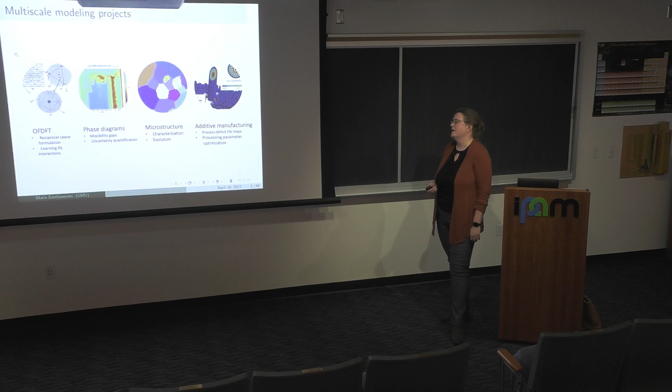And that's going to be the majority of the things that frame the theory that we're developing. But I also have a couple of other projects that fall within the framework of this workshop, and specifically we are working very closely with a group in thermodynamics to understand phase diagrams and how to compute and automate the procedure for phase diagrams. And there are a lot of developments right now in terms of uncertainty quantification. I'm happy to talk to anybody who wants to discuss that later on.

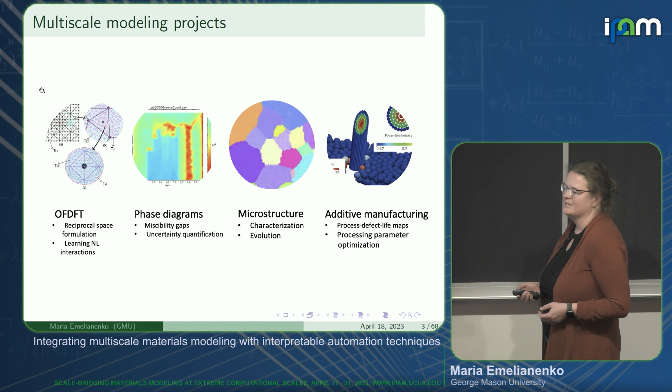I also have a project right now that has to do with learning non-local interactions in orbital-free DFT, and that's a separate work that we're doing at Mason. But the majority of the stuff I'm going to be focusing on lies in the realm of microstructure and additive manufacturing, which I think is a fascinating application, and there's a lot of need for mathematical development.

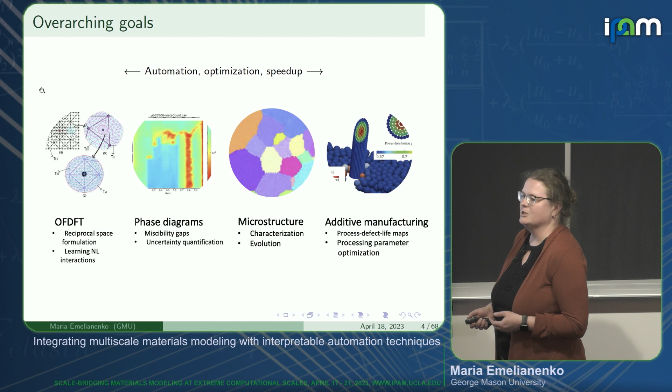So roughly what I like doing and what my group has always been focusing on is understanding how to automate things, how to optimize, how to find a relationship that can help speed up the computations and also guide the experimental design. In most of the things that I have been working with, we have to perform some sort of data-driven modeling across the scales, and I like to go from the very bottom to the top, or at least to some subset that doesn't belong to one scale.

So usually there are processing parameters that we try to optimize, or microstructure parameters which are mesoscale, and then we go all the way to the macro scale when we talk about mechanical response. And we want to understand the mechanism. So this is really what's driving some of the work that we're doing. And at the end, it's an optimization problem. A lot of the things that I'm talking about fall in the realm of what people call machine learning nowadays, but it's also just optimization and fitting sometimes, and it's just data analysis.

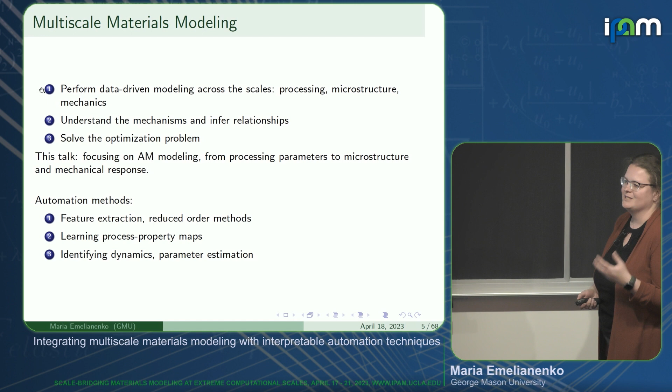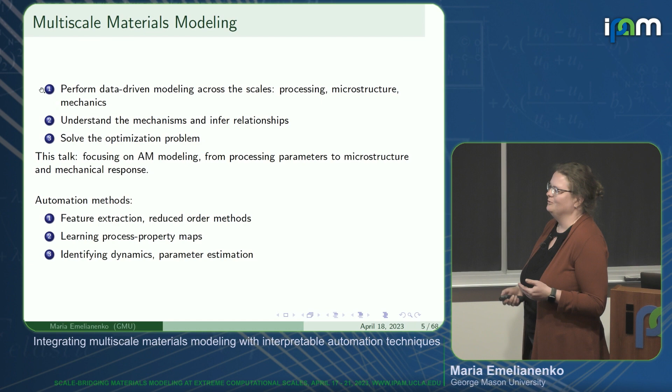So the methods that I'm building, this is the toolbox that we're trying to discover as we go and see what needs arise, have to do with feature extraction, reduced order modeling, learning process-property maps, and this could be manifold learning type of work, and also identifying dynamics and parameter estimation. So there's a variety of things, but I hope that at the end of the talk I will give you a glimpse of how they all fit in some of these applications.

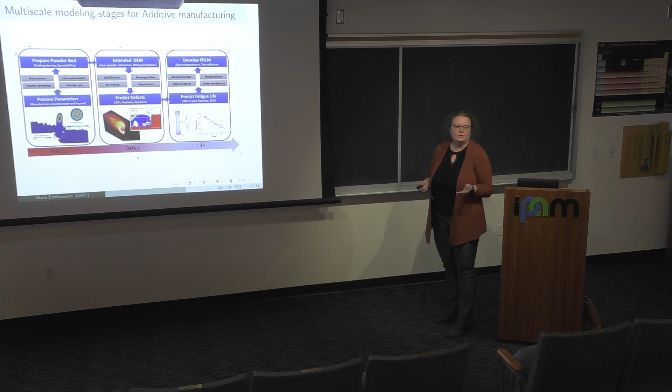So what drove me to this new project in modeling 3D printing or additive manufacturing is just the sheer complexity, and also the fact that there are so many interesting questions that have to do with how to really make this process work the way we want it to work, how we want to predict the microstructure, how we want to predict the performance of the material, and can we control it. We're using it more and more every day. The engineering field is booming. So can we put some mathematical intuition? Can we put some methods in place?

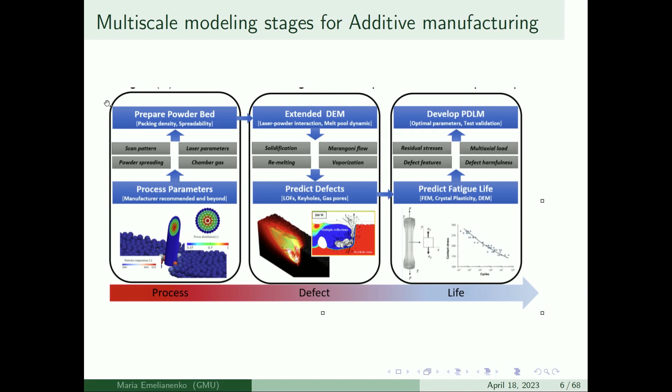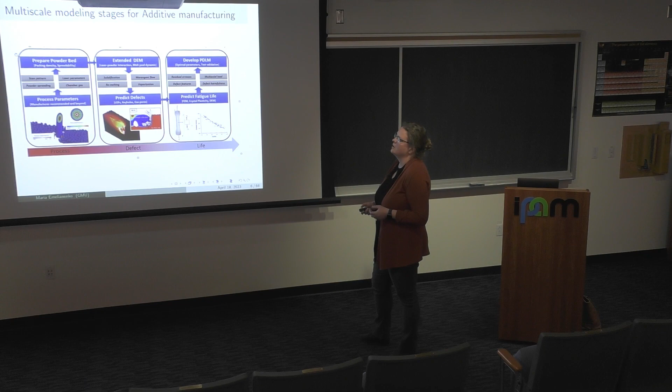So this is the integrated framework that we're using. I have collaborators in Luxembourg. They're performing the large-scale simulations of the powder fusion, and basically what we're getting out of these simulations are parameters that have to do with powder spreading, scan patterns, laser parameters, and chamber gas.

All of these processing parameters are essential in controlling the results of the process. But then, there needs to be the defect analysis. So there are a lot of defects in this process that get generated, and there's a variety of different terminologies. There's gas pores, there are keyholes, there are lack of fusion defects, and they result as a complex modeling artifact, but also in reality you see this in experiments as well.

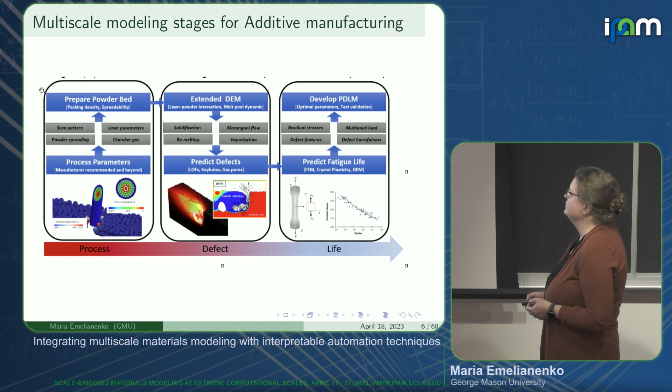And then after you have this defect information, we want to look at what happens to the fatigue life. So we chose fatigue, but you can do similar things with mechanical response in terms of elastic and plastic deformation. So that's roughly what we're looking at, and there are many people involved in this effort, but this group of Bernard Peters in Luxembourg, they're developing the code that incorporates these equations.

So basically you have energy conservation with boundary conditions. There is some sort of rate of melting that you assume. So all of these have a lot of different modeling parameters. And I'm stressing that the fact that there are a lot of modeling parameters is something that I want to focus on, right? So we want to actually reduce that number. And then we have momentum conservation, rate of melting, and such.

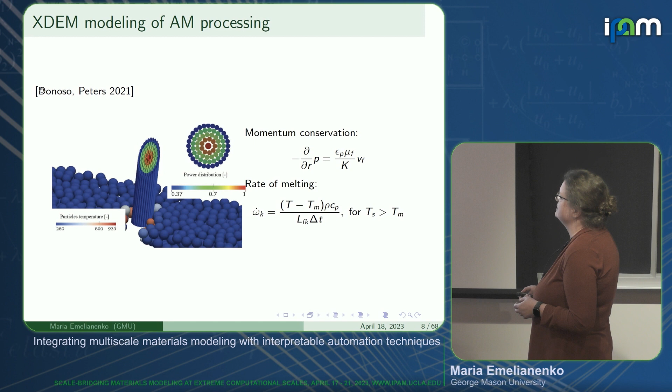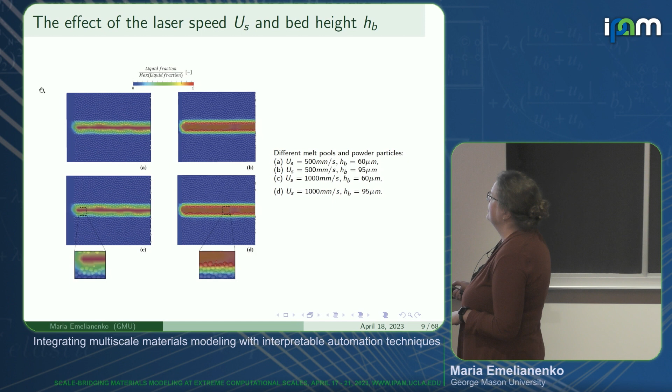And then there are a lot of different things that you can do. You can modify the laser speed, the bed height, all of these parameters in terms of in which direction you scan the sample, how you put it on top. So all of these technicalities. But you produce different results, right? And then you have to do the microstructure analysis of the sample.

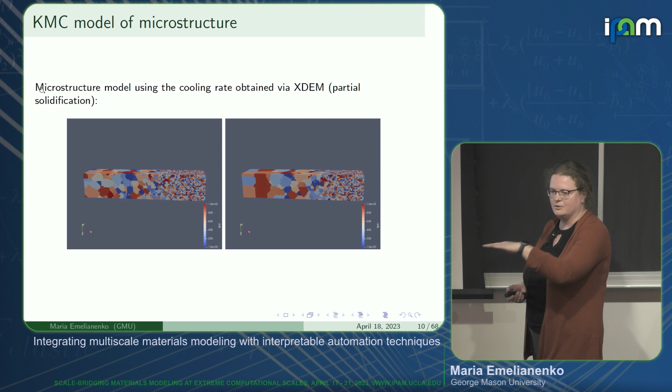And so this work is actually the KMC type of simulation that they're doing, which you can see is very uneven, and it's very different from the pictures that Katayun has showed, because there's a lot that's going on in this process. There's a very quick solidification, and then there's another pass. So the microstructure is really tough. It's really not easy to even understand what it looks like.

And so what we started with: NIST, the National Institute of Standards and Technology, has a set of benchmarks. So they actually calibrated their experiments, and they carefully curated the set of data for the specific purpose of additive manufacturing modeling. So we took a couple of samples, we looked at them, and they provide this microstructure. So these are experimental samples.

And you can guess that this is going to be the case, but obviously, depending on how you cut and which part of the sample you look at, you will have a very different structure, and of course, it will manifest in different probabilities of you getting a fracture or some sort of different mechanical behavior as a result. So there is a lot on their side that people have done to understand.

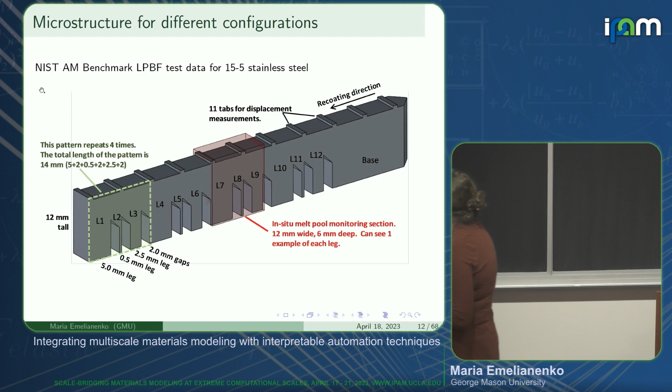To work with these specific samples with specific examples, people are competing over which model works best to represent these experimental results. But for us, the first thing that we were trying to do is to understand, first of all, can we do something fast, right? And fast sometimes doesn't mean good, but one very long-standing problem in this field is to trace the boundaries of these grains. And so, our collaborator, Katayun Barmak, used to use graduate students who would just trace it by hand.

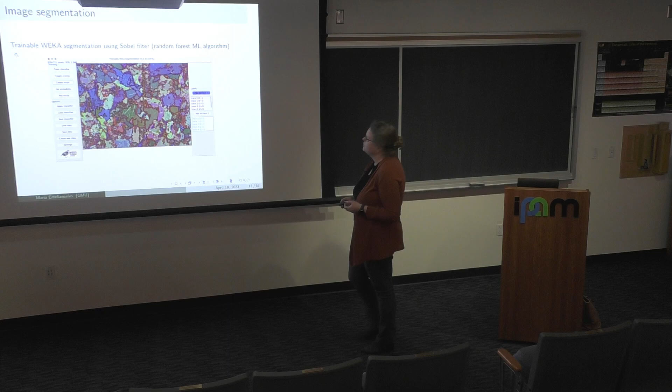And of course, nowadays it's an imaging task, so it should be done by a computer. So we should not subject anyone to this labor if we can afford it. So indeed, there are tools, and this particular one is the ML algorithm. It's using a Sobel filter, and it's doing a pretty good job. It's tracing those boundaries, and the images are kind of nasty. They're really not so clean, and you can see defects inside.

But you can actually get the boundaries, and it can tell you the size of the grains, and all of these characteristics. So it's nice that you don't have to really spend hours tracing it by hand. Yeah. But did you try to check different statistical metrics? Because okay. That's next. Yeah, so absolutely.

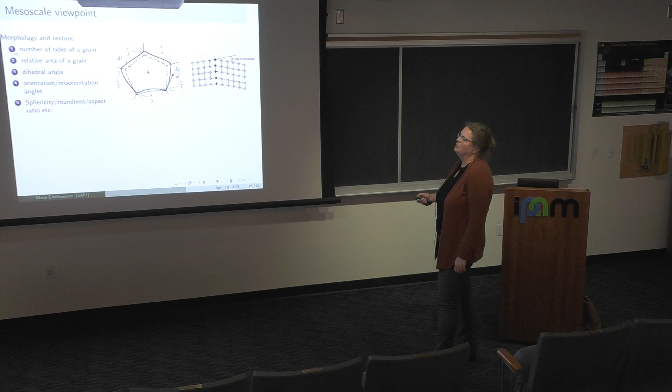So this is basically what we need to do always, is to look at the statistical distributions, and there are a variety of different measures. So the software actually does calculate the circularity, the roundness. There's also, what we need to know, the relative areas and dihedral angles and all of that.

Whether we have done an extensive analysis, no. But what we have seen so far looks reasonable. I do feel that these methods, although they're fast, they need a little bit of tweaking. The way this model works, I don't know if any of you use this particular software, but it asks you to trace some boundaries by hand, and then it's learning as it goes.

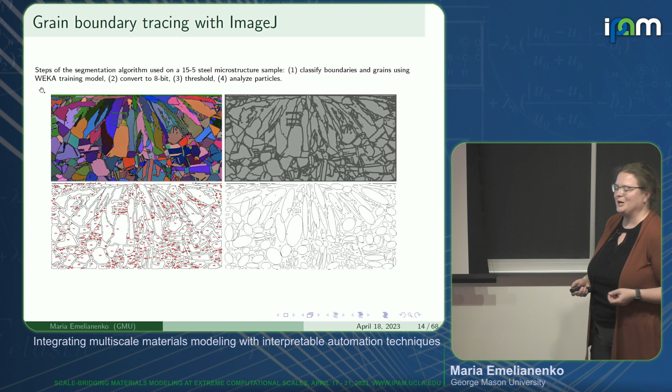So you can see, if it needs more input, you would trace more boundaries. So there's a little bit of labor-intensive part, but it's really fast. In my experience, I traced maybe 10 of them, and it did a pretty good job. But it could depend also on the image. So it is one very quick machine learning task that we were able to bypass and use the technology that's available.

But then, this is really not telling you much. What we need to understand in this sort of application is how to correlate the processing parameters with some statistics, with some mesoscale characteristics, and with the mechanical response. So this is the image that I'm showing every time I'm giving a talk about microstructure, because there are all of these parameters: the number of sides of the grain, the area, dihedral angles, orientations, and all of these will potentially play a role in additive manufacturing as well.

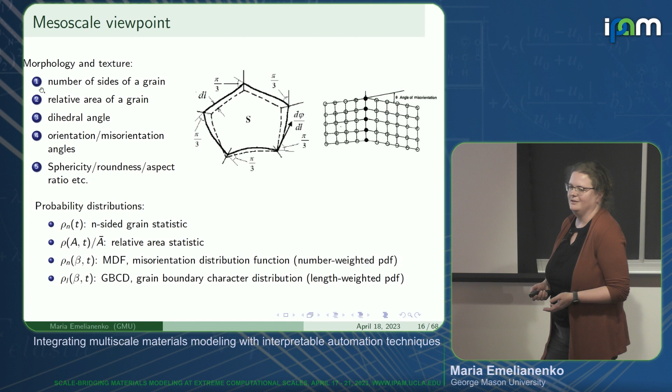One particular characteristic that we discovered unrelated to additive manufacturing is the microstructure disorder characteristic. It's a very easy concept to grasp. It's just the information entropy type of concept. But what you can do with it is look at any random variable, be it number of sides or areas or any roundness characteristic that you want to impose on a grain, and measure it, right?

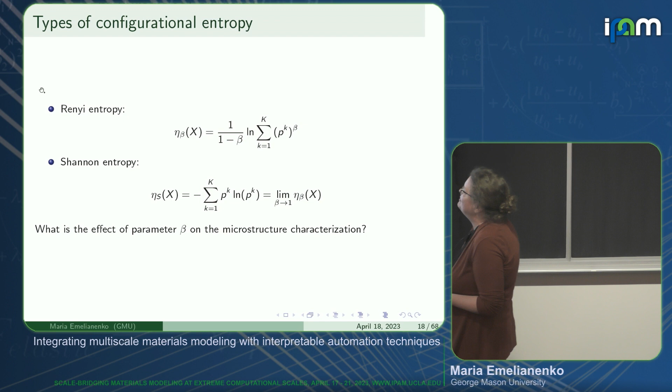I wanted to draw your attention to this because we found some interesting results when we started changing this Shannon entropy and introduced the Rényi entropy, which has this parameter beta, which in the limit gives you the Shannon entropy, but it doesn't have to be 1. And we correlated the results with simulations using this distance between microstructures. So we're basically computing this Jensen divergence. We focused on grain area and the number of sides, but you can use other variables, other random characterizations.

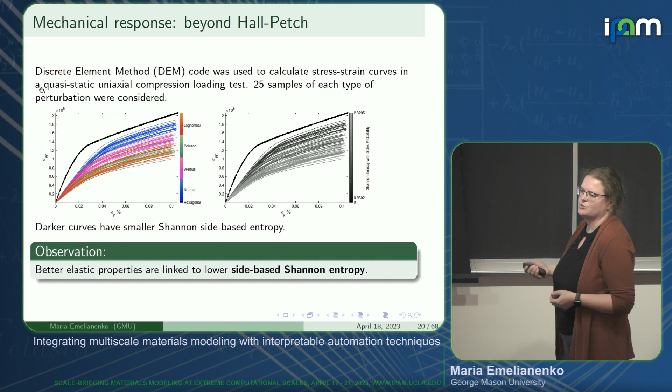So this was done with DEM, discrete element method. What we tried to do is create these samples, which were randomly distributed with a certain entropy parameter, and then we looked at the corresponding strain stress relationship. And what we found is that it's actually very much correlated. The darker curves have smaller Shannon entropy. The top one will be the perfect hexagonal lattice. And when we distort it and introduce more disorder, the curves go down. This was pretty systematic and pretty clear from all of the runs that we tried.

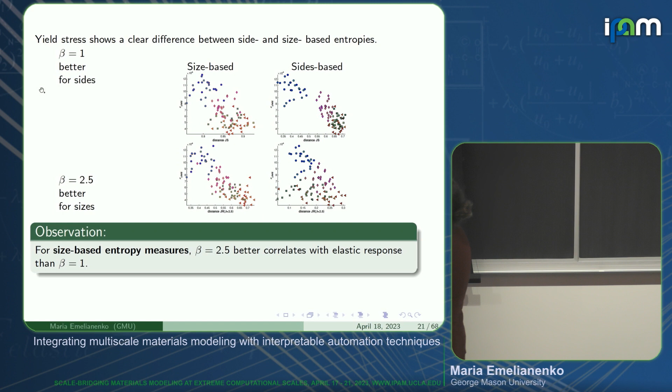The other thing that we did is we looked at the yield stress. There it was less clear what's going on, because what we wanted to see is some sort of a clear correlation: if we change the entropy, then the response changes accordingly. And it was better correlated for beta equal to 1 for the side-based statistic. But when we looked at the sizes of the grains, beta equal to 1 gave us this big mess. When we changed the parameter to 2.5, it allowed us to see those clusters and the correlation better.

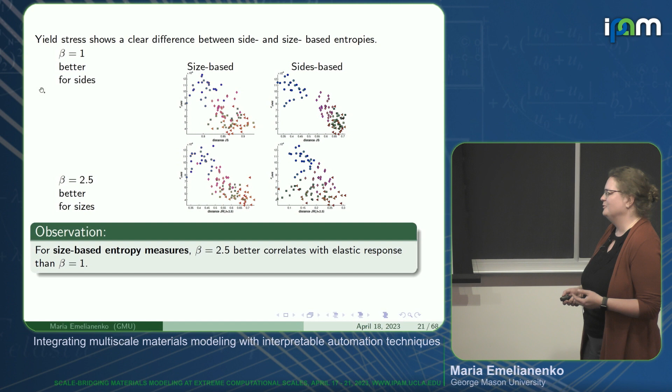But this is just empirical evidence, right? This is not really a theory that can explain, but what it does bring us to is the realization that there could be a lot of different characterizations of the microstructure. And how do we pick one? How do we actually make sense of what's going on? And can we build a theory for it?

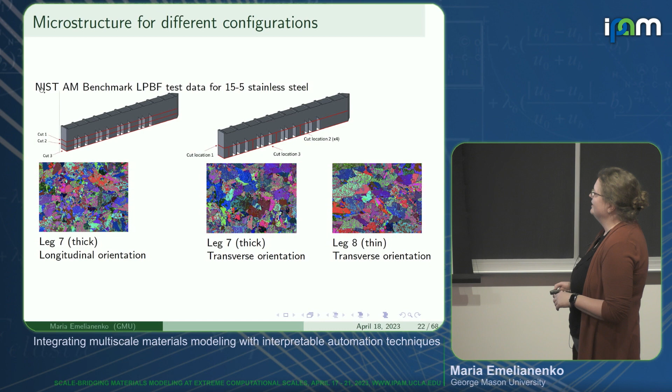So again, going back to these images, which were all fuzzy, I showed you how we try to understand what's going on with the images. We also computed some of the parameters in terms of roundness, circularity for different legs of that construction that they had in the benchmark. But it's giving us more open questions: which microstructure properties best correlate with residual stresses, entropies? How does the melt pool play a role in this? Because there are melt pool characteristics that we have not taken into account.

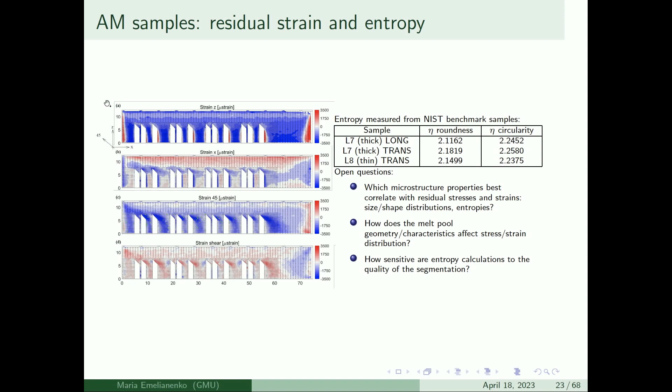How sensitive are these entropy calculations to the quality of the segmentation, and so on and so forth. So it's definitely a task that you can try and put somebody to measure all of these things, but there must be, again, some way to bypass that manual labor, right? Like there should be some way to automate the process, and that's what is driving our research.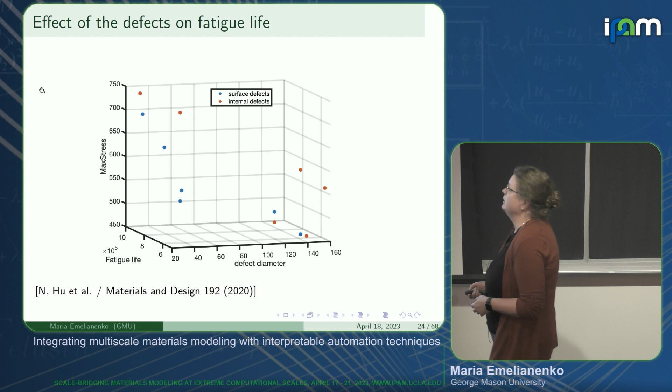So again, an additional aspect to this is that the defects play a role, right? So the defects, depending on where they are, surface defects versus internal defects, the corresponding stress and fatigue life are affected. So if you have more defects at the surface of the sample, then you see these blue dots here compared to the red dots in the internal. And there's a lot of experimental literature on this. So this is not something that we have done, but we have looked up a variety of different papers.

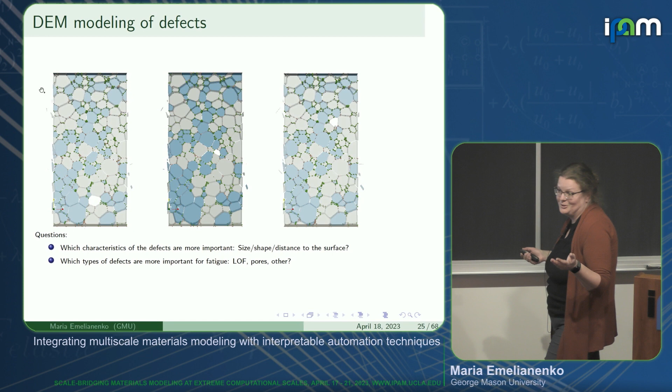And what we have tried to do naively is just to put these defects in the DEM code inside the sample and then move it closer to the boundary, closer to the surface. And we actually have calculations that show that it does affect the corresponding fatigue life. So again, what does it say? There are so many entangled characteristics, right? So how big the defects are, what is the geometry, what is the melt pool, how close they are to the surface. So all of these things combined make a higher dimensional task for us to work with.

So what we realized is that it's basically a minimization problem where we have to have some sort of relationship, right? So if we want to minimize defects, that would be this F, the fraction of defects in a microstructure. We need to also take into consideration the corresponding microstructure characteristics we want to optimize. So we want to minimize some collection of things, right? It's a multi-criterion optimization where we want to achieve a certain elastic and plastic response as well as some characteristics of the grains. And there are so many knobs to pull, right?

So with this problem, you can focus more on defects, or you can focus more on the microstructure optimization, and then how exactly to go about optimizing this distance between the microstructures is even harder to tackle. So you have to learn the surface if you want, or somehow a closed form representation of the problem to make it easier to solve. How possible is this? So we're making progress. I'll tell you about some of the methods that we're developing that I think will be fundamentally useful here.

So one work that we found that was very relevant is the work by Bakarji et al., just published recently. What they're doing is they're using machine learning in a very unusual way. They're learning the dimensional groups, or I would rather say non-dimensional groups. So the Buckingham pi theorem is this dimensional reduction result that everybody teaches maybe in an undergraduate applied math class. And usually if it's a small problem, you can do it by hand. If it's a problem with multiple parameters, you can still form a matrix with units attached and still do the reduction.

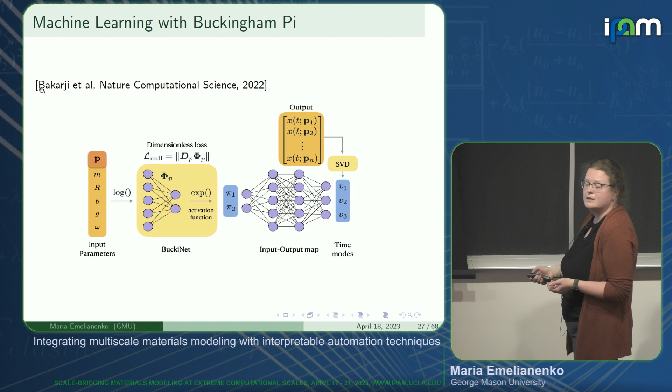So we're going back to the basics. In general, in statistics, you would use a PCA or SVD to find the dominant directions. And this method, of course, can be used directly, because if you look at their chart, they are using SVD to come up with these modes at the end. But what if we cannot do the SVD? Sometimes the matrix is so large that you just cannot pull it off. So what we needed to do is think about a way to decompose this process and somehow divide and conquer. Use a strategy to reduce the dimensionality.

And so this slide is obviously not a surprise to anyone. This is just a regular SVD decomposition. So you have your unitary matrices, U and V, and you have the diagonal sigma. And then you can, of course, truncate it if you know that the profile of your singular values is decaying. Then you can cut it at a certain point, so you can speed it up.

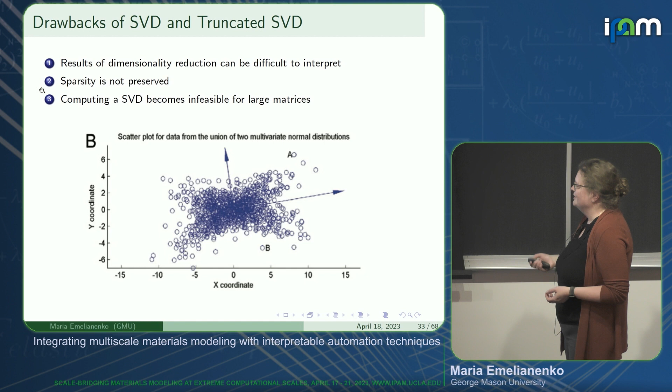But one of the biggest challenges, the one that's preventing us from just directly using SVD, or at least presenting a problem, is that when you're doing an SVD, you're projecting on these SVD directions, on the principal components, which don't mean anything. They actually are not physical, right? They mean something for the PCA or the SVD, but they're not your original physical parameters. And so we're going away from really looking at the data, and we're looking at this XY coordinate space, which is not interpretable. And people have thought about this. In this case, it's kind of nicely oriented, but this picture shows that it's really not clear how it's related to the x and y coordinate. It doesn't have to be related.

So there is this paper that came out in 2009 that is very interesting, and it generated a lot of activity after that, which is the CUR decomposition. CUR is basically a process of selecting columns to get an approximation to the SVD. So you're getting something not exactly equal to the SVD decomposition, but your matrix approximation can be made arbitrarily close to your SVD by doing this procedure. So this method we can use, and that's great. We knew that we can incorporate some of this interpretability, but it still doesn't solve the problem of dimensionality.

So what we have done is basically coupled it to the concept of centroidal Voronoi tessellation. And centroidal Voronoi tessellation, if you're familiar with this, is a very powerful way to tessellate a domain, decompose it into cells and find the representative features in the data. And in this case, the distance that we will be talking about is the distance to the subspace. This concept is very flexible and generalizable to a variety of different contexts. But here, basically, we're picking the distance, which is the projection on the subspace distance, right?

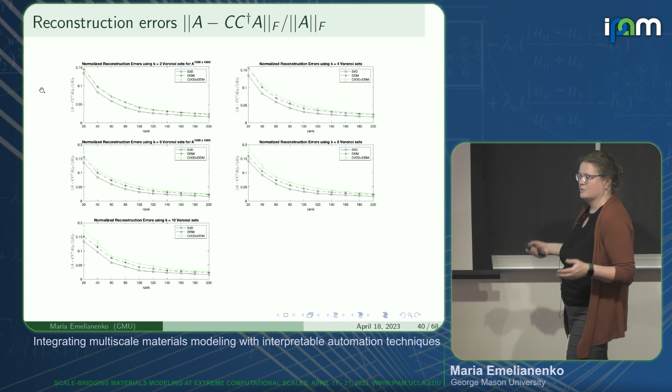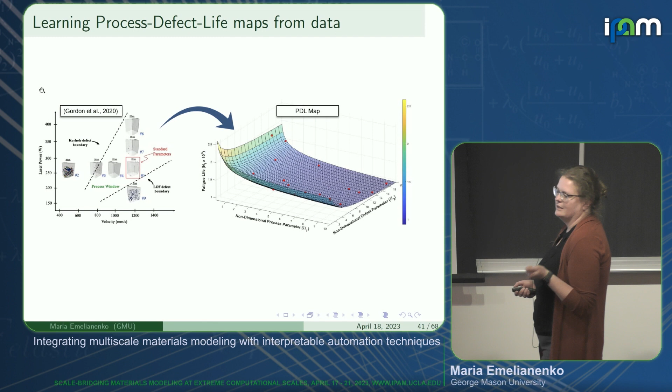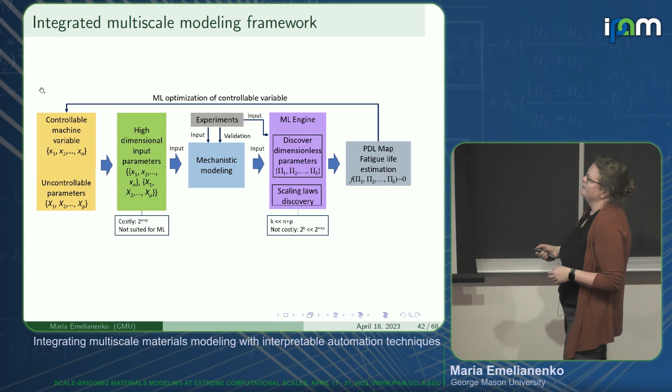And so this is kind of the overall schematic, right? So we have controllable parameters, and we're going through this mechanistic modeling stage to come up with dimensionless groups through our machine learning engine, and then get the PDL map as a result.

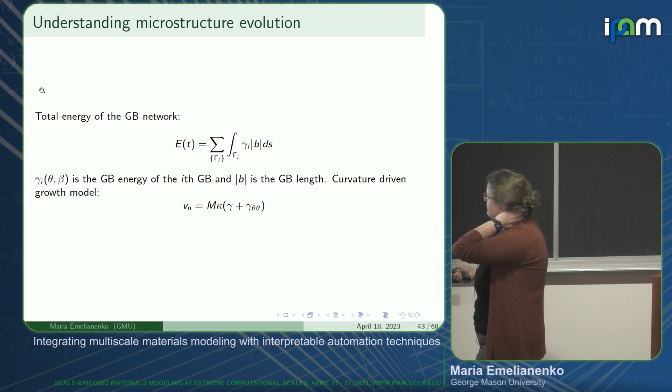The question is, what happens to microstructure? And that is a non-trivial question. And as you have seen, Katerina gave a talk about the different developments and how to model microstructure evolution, even in the context of just this thin film with no additional layers. I'll give you a couple of things that basically can help to understand it, but I will not give you the solution to this problem. So this is the same kind of energetic formulation that you have seen, and the curvature-driven model can be postulated like this.

What we do have at this point is we have a variety of different models, which are kind of PDE-type models that Katerina talked about, but we also have simulations. So one type of simulation is based on this straight line approximation, very simple vertex code. So you're basically tracing the motion of the triple junctions, and the boundaries are straight lines. And it amounts to basically the triple junction dynamic equation. It's similar to a triple junction drag. If you're familiar with that concept, it's basically saying that triple junctions are playing the most important role in the process.

So we actually have done a lot of work to prove that this particular implementation of the vertex code is stable. So we have stability analysis, kind of like a CFL condition type of result. And still, if you look at what happens to the results, they fall not exactly on top of the experimental prediction.

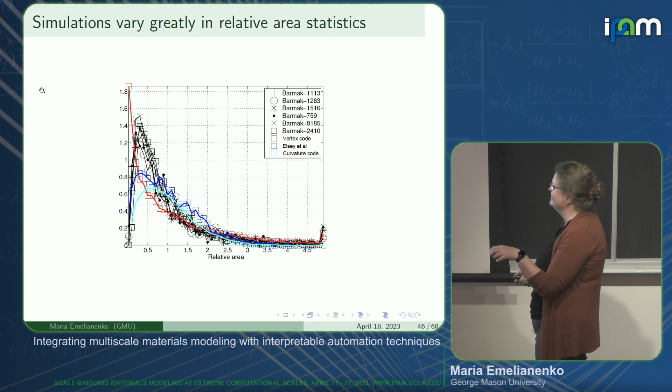And what we saw is that you can change where this curve is if you change these mobilities of the triple junctions. And so that motivated us to look into the development of this coupled model, which couples boundaries and triple junctions together. And then you have flexibility to choose the ratio between the two mobilities of the boundaries versus triple junctions.

And so this was kind of the Lagrange interpolation type of idea that Claudio Torres and his students have developed recently. And so you can basically implement these codes, and you can run large-scale simulations with a lot of grains. What you see is that there is an effect of this ratio, as I said, right?

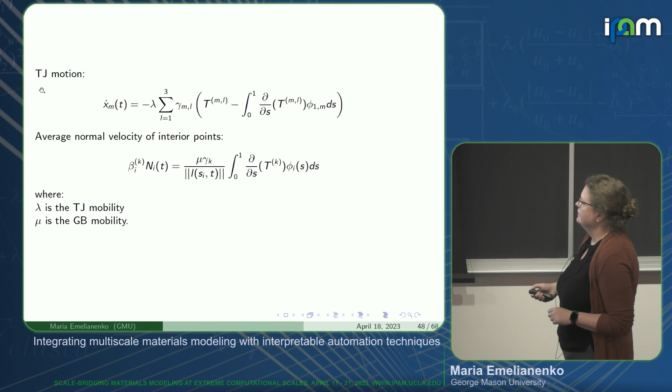So this ratio kappa is the mobility of the triple junction versus the boundary. So if you have 1, then they're equal. But if you have kappa equal to 1,000, then, let's see if I have it somewhere here. I did not. Yeah, so basically that would mean the triple junction drag. So right here. All right, so this lambda dominates compared to the grain boundary.

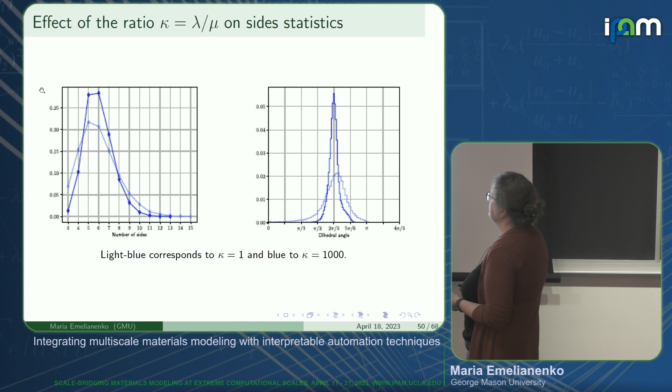And you can change the shape of these distributions, and you can match it with the predictions of the experiment. But all of this is to say that there are a lot of things that you can modify, but it still doesn't give the full description of the process. So there are mesoscale theories that have been developed, so I will not go over this because Katerina already talked about some of them. So Mullins von Neumann, the McPherson-Srolovitz, and so on.

And so this is roughly the hierarchy of mesoscale models. So this is the model that Katerina is extending right now, including many more parameters than originally stated in this form. We also developed the model that basically treats all the misorientations as particles that are colliding. It's like a gas dynamics model, which resulted in a Boltzmann equation.

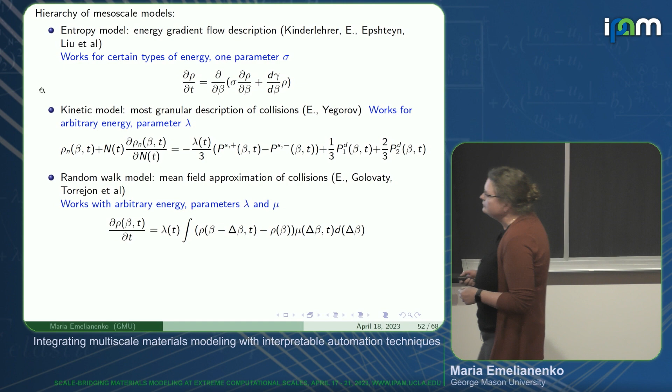So in this case, all of these collision terms do describe the specific reconfigurations that take place during the grain growth. And it's 2D, but it does handle energies that could be non-smooth, for instance. So there are a lot of integrals on the right-hand side of this equation. And we also had this random walk model, kind of similar to the stochastic process description that Katerina talked about. So this was another attempt to try and model the same thing.

But there are still questions. So one of them is, of course, generalization to 3D, which is difficult, but I think doable, especially in this case. But also the formal derivation of the continuous limit. So how exactly these models are interconnected. That's still a very interesting question, whether or not, for instance, we can show that the equilibrium for these models match in a certain situation.

But the question to me has been for a while, how do we actually go and model something like additive manufacturing? Because that's really much harder to do at this scale. So one idea, and I have not tried this, but there's a lot of literature, and some people have looked into data-driven dynamics identification. I don't think anybody tried to actually fit this particular problem, so that could be an open question. I'm happy to collaborate with whoever is interested in that.

And I'll just mention, I didn't talk about SINDy specifically, but there are physics-informed neural networks that have been tried in this context, as well as dynamic mode decomposition. So the question would be, if we use a sophisticated machine learning technology like that, can we actually get something similar to what we have derived from first principles? And that would be an interesting task.

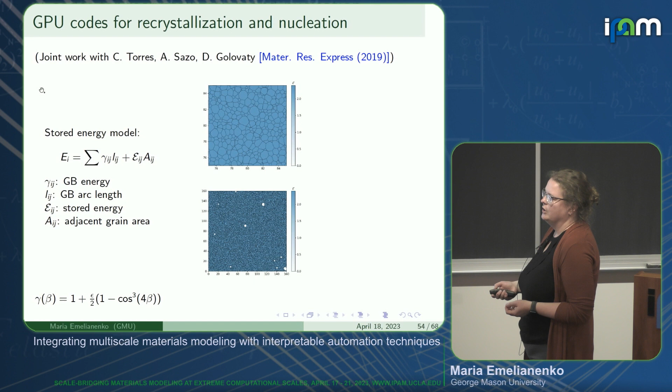One thing we know how to do, and we want to use it in this more complicated context, is we know how to add nucleation. So this is the code that we have available. This is a GPU parallelized code that incorporates stored energy, and that allows us to nucleate grains of specific misorientations. So this is the mechanism that seems to be actually quite easy and not so sophisticated compared to the previous descriptions that we had.

We did a lot of work with this particular code, so we actually have the code, and I think it's handling like 1 million grains right now. So we have done development of stability analysis.

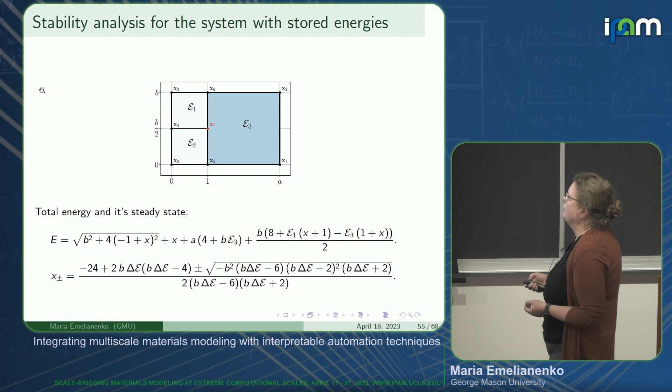For instance, for the stored energy, we need to know how to write down the total energy, and based on this, we can say for which conditions we will have steady states and the bifurcation change. So this informs the selection of the parameters for this code, and we also know what would be the corresponding steady state. So we tested the code, and we actually derived analytically that in the absence of the stored energy, this will be 2 pi over 3.

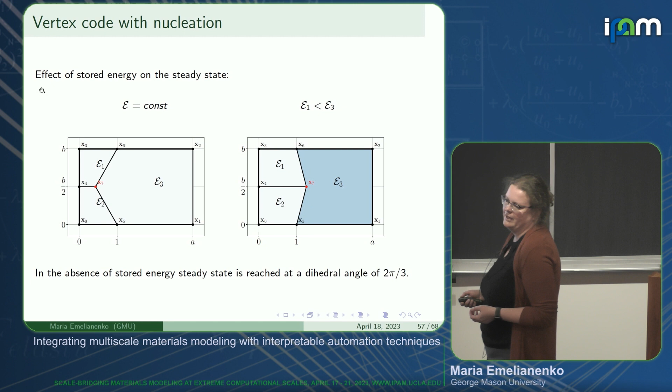If the stored energy is constant, but if there is a stored energy that is, for instance, bigger on one side, then your stable configuration will no longer be 2 pi over 3. And you can actually show this. It kind of looks weird, and maybe we're used to having Herring type conditions at the triple junctions, but it will not be that way if you have some sort of stored energy.

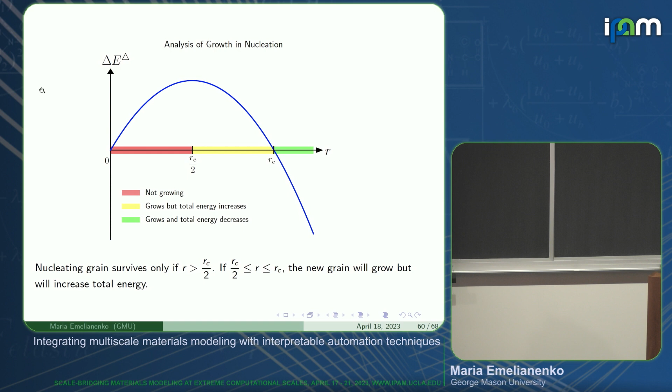This is a little bit more detail about how to nucleate. So we basically look at the middle of the triangle, and then we nucleate a grain if a certain condition holds. That's based on the stability principles that we defined, and we have the critical radius of the grain derived for which we can expect nucleation. So this is just a picture showing that if you exceed a certain critical radius, then you definitely nucleate. In this regime, the grains will grow, but the total energy will increase, and then you do not have a growth in the red area.

And the only thing I would say on top of that, it seems like a Monte Carlo procedure for generating these nucleated grains works well. It's roughly a Metropolis Hastings type of criteria here. We did employ this polling system for boundary flipping. So the boundaries kind of voted which boundary to flip, which gave a little bit of randomness. But the numerical results seem to indicate that it's doing what it's supposed to be doing. So if you give 0 stored energy to all the grains but 1 grain, then it will grow.

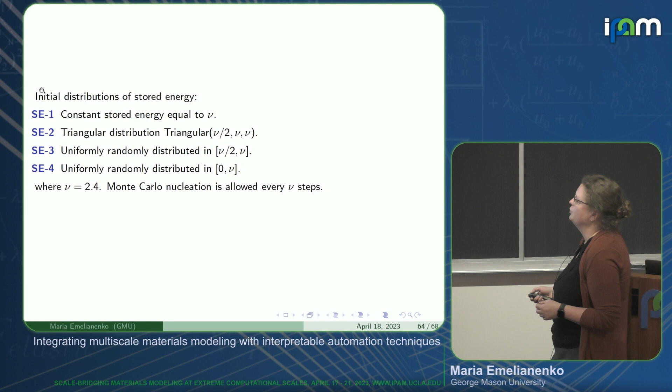And we tried to distribute the stored energy in different forms and did the nucleation at a certain point and looked at the statistics. So similar to our previous results, we can see deviations. I mean, the general shape stays the same, but you can actually modify these distributions if you pick this nucleation regime in a certain way.

So for this piece, we talked about a lot of different things, but ultimately we want to connect them, right? These mesoscale models right now are not yet at the maturity level to be useful in terms of modeling additive manufacturing processes, but some of the characteristics that we have are actually showing promise in terms of understanding the relationship between the microstructure and the corresponding fatigue life or elastic response of the materials. We do have these dimension reduction tools, which compared to what is done in the literature promise to tackle a huge data set that would not be possible otherwise. So we feel that this is a really nice way to proceed with some of these approaches that I described.

And these GPU codes, although they cannot have the full physical complexity of the additive manufacturing processes, can shed light on what can be the source of some of these distribution differences and statistical features that emerge. But overall, this leads to a lot of questions. And I want to say that we have tried different approaches with machine learning that failed. So whenever we use it, we need to use it with care. But there are promising directions that can help automate image segmentation and tracing of the boundaries for sure, dimension reduction, and possibly inference of the dynamics.